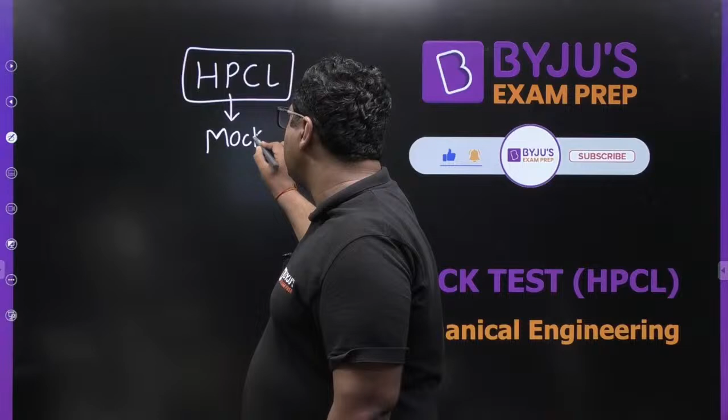So guys, this is a mock test for HPCL. As you know, now only 1 month is there for this examination. So today we have a mock test for the same, following the same pattern as HPCL. We are going to cover 85 technical questions today, and for the non-tech part we have a different time. So 85 questions we will be covering and all the subjects would be covered.

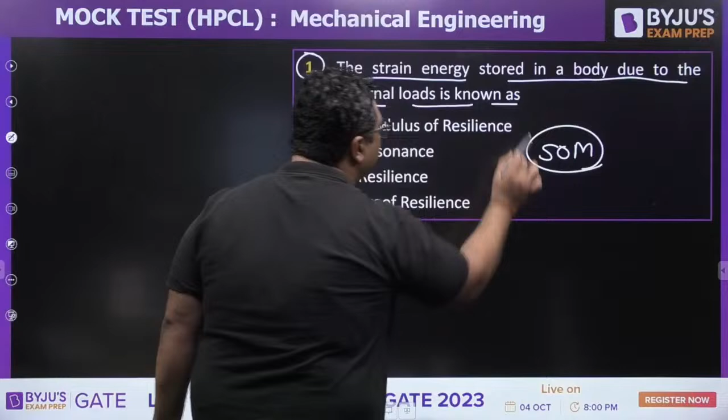Very good, Tomato Singh is saying the answer is C. What about others? The strain energy stored in a body due to the external load is known as - is it proof resilience, resilience, resonance, or modulus of resilience? So my dear, this is the question. It is not mentioned whether within the elastic limit or not, so we will be answering it arbitrarily, and the answer is going to be resilience, because toughness is not in the option, so automatically it would be up to elastic limit only. The answer will be resilience, because proof resilience is the maximum value of resilience - if the word maximum would be there, then the answer would become proof resilience. Resonance cannot be the answer. And if they are asking for strain energy per unit volume, then it would be modulus of resilience. So as it is only strain energy, the answer is going to be C.

Very good, Mani. The answer is correct. Nora, very good, the answer is correct.

Question number 2, this is from computer integrated manufacturing, from production guys. Quickly share the session into the group so that other students can also join it.

The mirror image for a 2D reflection which is generated relative to an axis of reflection by rotating the object by what angle? Nora is saying the answer to be B, Pudina is saying B, Tomato is saying B, Mani is also saying B. So guys, let us say we have the axis like this, and this is a point. If you want to make the mirror image of this point about the y-axis, let us say this is going to be the mirror image.

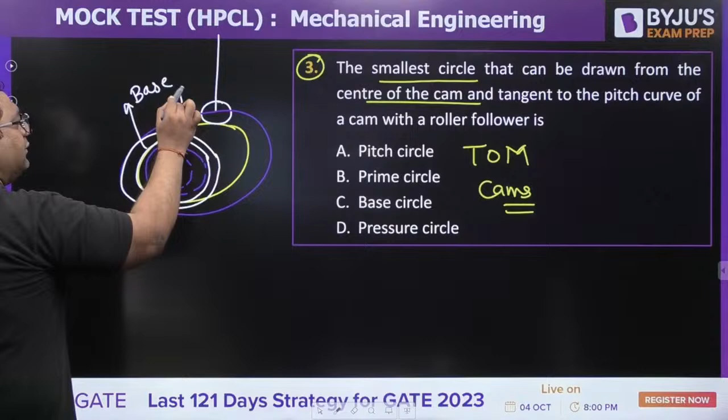So what would be the answer, guys? All of you are saying B, all aligned at B, and yes, you are correct. The answer is B, which is nothing but the prime circle. It is correct. Moving to the next question, guys.

This is from engineering mechanics. So you can see every question is from a different subject, a different topic. So everything is clear, everything is covered, guys.

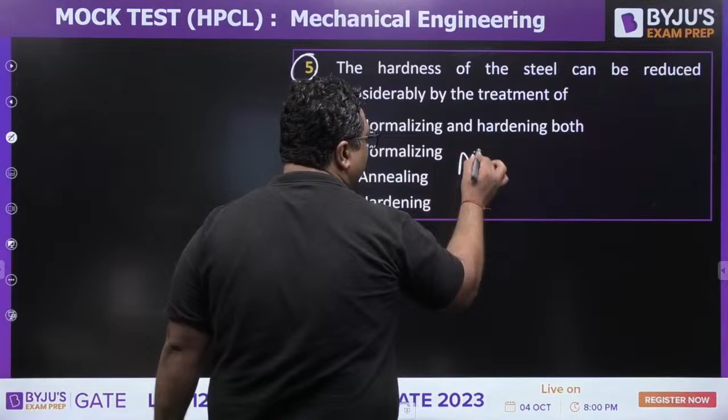Next question is related to heat treatment, that is material science. So guys, just try to solve this one. The hardness of the steel can be reduced considerably by the treatment of normalizing, hardening, normalizing, annealing, and hardening.

Yes, Tomato, what will be the answer? So guys, this is the HPCL level, as I already said, based on the exam we are taking. If you see the GATE champion series, that is going for the GATE level. So based on the level of exam, the level of questions are decided.

Yes, they are asking about the hardness of the steel being reduced - look at this word, hardness is getting reduced. We will go to C. Yes, hardening is done to increase the hardness. Then if you see normalizing and hardening, this cannot be the answer because hardening is there. When we talk about normalizing versus annealing, obviously annealing will reduce the hardness because in annealing we are going majorly for stress relief phenomena, and that is why the answer is C only, because in normalizing we also get fine grain structures, so there too the strength and hardness are better than the coarse grain structure.

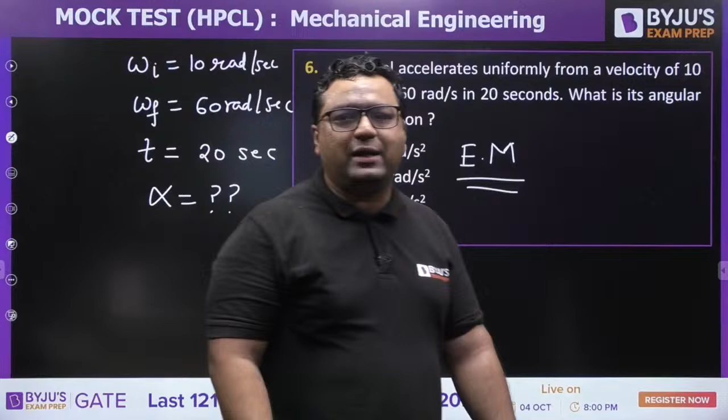So you know the equation in linear motion as v equals u plus at. Here the equation will be omega final equals omega initial plus alpha times t. So guys, just find out the value of alpha. You have all the values.

Yes, Priyanka, what would be the answer? Tomato is saying D, Pudina is saying D. Nora, what would be the answer? So the answer will be D.

So you can put the value. It is 60 equals 10 plus alpha times 20. So alpha will be coming out to be 2.5 radian per second square. D is the right answer, guys.

Now question number 7, guys. The fundamental property of material able to resist abrasion. The options are resilience, toughness, malleability and hardness. This can be considered from SOM or material science, because in both topics properties of materials are there.

Tomato Singh is saying the answer to be D. Pudina is saying the answer to be D. Very good. Yes Priyanka, Mani, Nora, what would be the answer for this one?

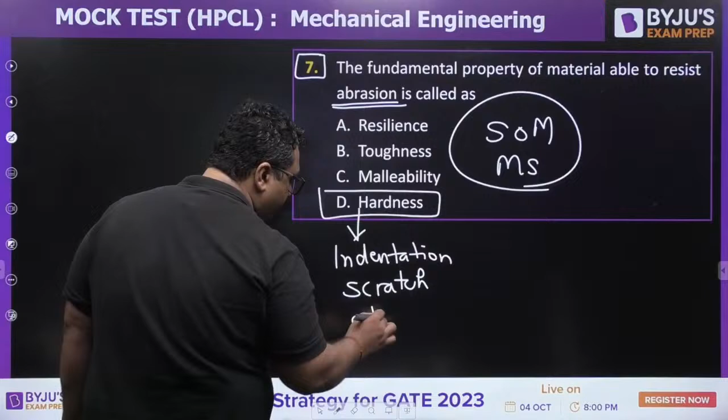So guys, the answer is going to be hardness. Hardness is the property which resists any kind of indentation, which resists any kind of scratches, which resists any kind of abrasion. So guys, for all these, only hardness is the property.

Question number 8, guys, this is related once again to strength of material. You have a simply supported beam of length 4 meter. They have given the length of 4 meter, the value of I, and also the value of load as 9 kilonewton. They are talking about the deflection of the beam. Obviously, if nothing is mentioned, we will talk about the maximum deflection.

So you know the formula for this is PL cube upon 48 EI. You just need to put the value and get the answer, guys. Solve it and give the answer. Formula I have written. Priyanka is saying answer is B. What about others?

Formula is there in front of you, guys, you just need to put the value and get the answer. Load is 9 kilonewton, length is 4 meter, 48, Young's modulus is 200 GPa, I is 12 into 10 to the power 6 mm4. Now everything is in mm, so the answer will also be coming in mm. Solve it and get the answer.

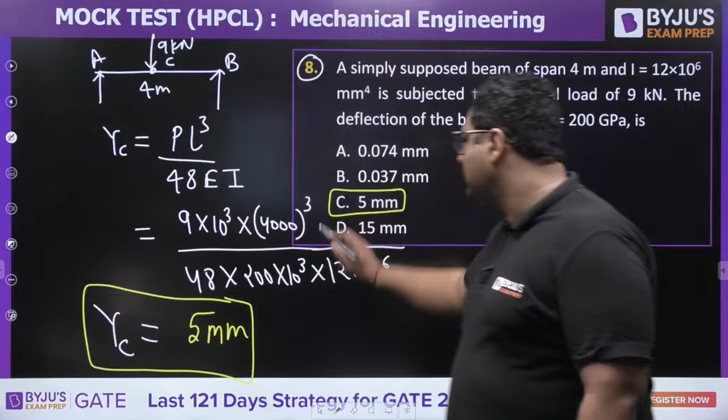Solve it and give the answer, guys. Pudina is saying C, Tomato is saying C. So the answer for this will be C. Yes, when you will see all the things are getting cancelled out and you will be getting the answer to be 5 mm. The answer will be coming out to be 5 mm for this. C is the right answer, guys.

Yes, moving to the next question. Next question is related to the elastic constants and their relation. The topic is from strength of material.

Very good, Priyanka, Pudina, Tomato, Mani, where are you, bhai? Solve this question, guys, now. The relationship between Young's modulus and modulus of rigidity. This is a previous year's question of HPCL as well.

Kameshwari is saying A, Pudina is saying D, Tomato is saying D. Priyanka, what about you? You know E equals 2G into 1 plus mu. E equals 3K into 1 minus 2 mu. So if you see this relation, we can write G equals E by 2 into 1 plus mu. So the answer for this is D.

Very good, guys. Moving to the next question, once again from material science, heat treatment of steels. In the nitriding process, the gas used is oxygen, hydrogen, carbon oxide or ammonia.

Yes, Tomato, this is the level of HPCL. HPCL is going to be easier, BHEL is going to be difficult, that is for sure. So if you see previous year's questions, you will say that they are exactly matching the level. What about this question?

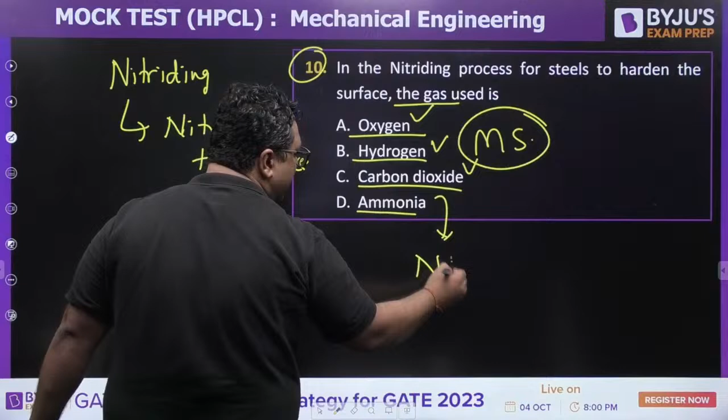Okay, skip. So I am telling you guys, for the nitriding process, we are going to add nitrogen to the surface. Can you tell me which gas out of these is having nitrogen? Arey bhai, this is oxygen, this is hydrogen, this is carbon dioxide. Ammonia is NH3, so when you use ammonia, then only nitrogen will come to the surface. So the answer is going to be D for this.

Question number 11, guys. In the metal forming process, the value of stress required for continuous material deformation is known as - is it ultimate stress, is it flow stress, is it proof stress, is it true stress? Continuous material deformation.

Yes, Tomato. So Tomato and Pudina have said the answer to be B. Yes, Kameshwari, what would be the answer? So the answer for this is going to be flow stress, guys.

As you know, in the compression test you have studied, this is the curve which is coming. This is said to be the mean flow stress. So the answer will be flow stress, because at flow stress the material continues to deform continuously.

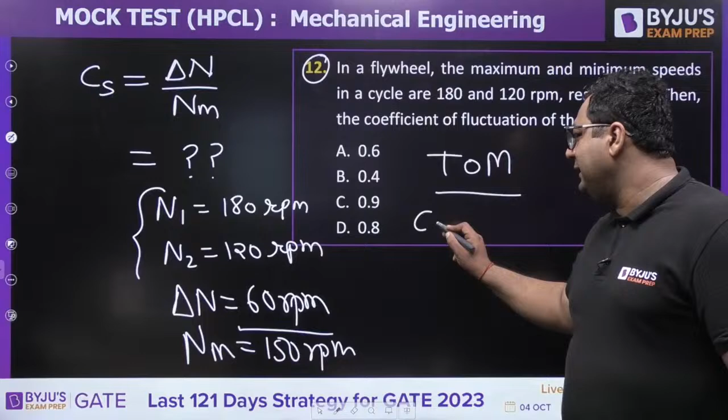So first of all, what is this fluctuation of speed? Yes, delta n by n mean. You can see it is given that n1 is 180 rpm and n2 is 120 rpm. So guys, what would be delta n? 60 rpm. And what would be n mean? 150 rpm. So what would be the answer, guys? Okay, Pudina is saying 0.4, Tomato is saying 0.4. So guys, 60 by 150 - 0, 0 will get cancelled out. This will be 2 by 5. Answer will be 0.4. B is the right answer.

Very good, guys, moving to the next question. This is from columns, once again the question is from SOM. If you see both the papers of last year...

Penetration topic - arey bhai, penetration you study in welding, so which penetration are you talking about here? Tomato, for that let's have a discussion on either phone or WhatsApp. I didn't get what you are asking. If you tell me the topic clearly, I will take a session on that - there is no problem.

So the end fixity coefficient is used in the crippling load equation based on Euler's theory of buckling of columns. The value of the coefficient for the case where one end is fixed and other end is hinged - you know that when you define it, the buckling load is n square. Okay, let me tell you, it is pi square EI minimum upon LE square.

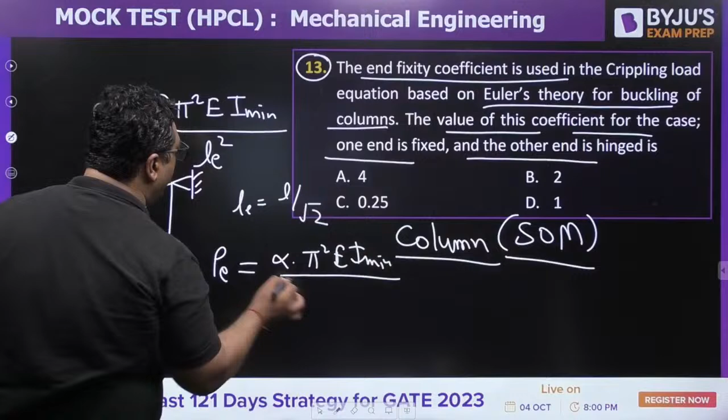So you know that for this case, this deviation will happen, and you can also write it as PE when you put it as LE. So LE will be L by root 2 for this case. So what would be the coefficient coming in the numerator if we take the standard formula as alpha pi square EI minimum upon L square? Can you tell me what would be the answer for this? Okay, Tomato is saying 2, very good, Pudina is saying 2, yes it will be 2, because root 2 squared will become 2. So here 2 will come - that is nothing but the end fixity coefficient. So 2 is the right answer.

Very good, moving to the next question, guys. This is from machine design, welded joints. What would be the answer for this one? A double fillet weld is used to join steel plates 5 mm thick for a length of 20 mm. The allowable tensile stress for the weld material is 100 MPa. The tensile strength of the joint is - you know that generally the tensile strength is given as 0.707.

0.707 T into L into sigma permissible. This is generally the formula. So based on that, you need to answer it. What would be the answer?

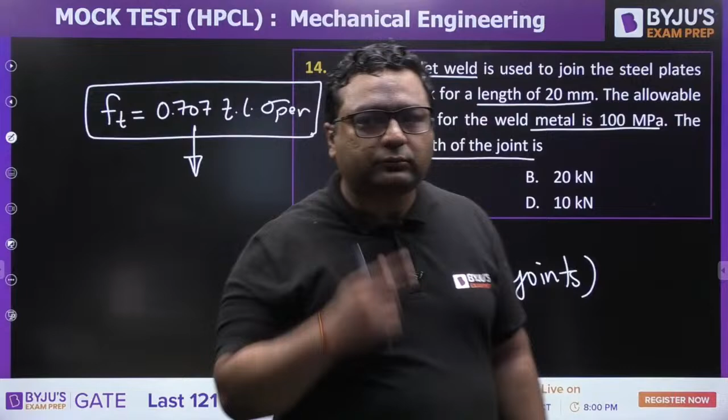Yes, Pudina, Tomato, tell me the answer, guys. Tell me the answer for this one. Very good, both of you are saying 14.14. Yes, Kameshwari, yes, Money, what would be the answer?

So guys, when you see this 0.707, thickness is 5 mm, length is 20, permissible is 100. So the answer will come out to be 7.07 kilonewton.

But my dear, they have mentioned the word double fillet. Double fillet, you need to multiply it with 2. So the answer will be 14.14 kilonewton. The answer will be C for this.

Very good guys, moving to next question. This is from theory of machines, balancing part.

So guys, let us see how many of you give the right answer for this one. This is the 15th question going on. I will be there up to 40 questions, after that Vipin sir and Chandra sir will come for the other parts of the paper.

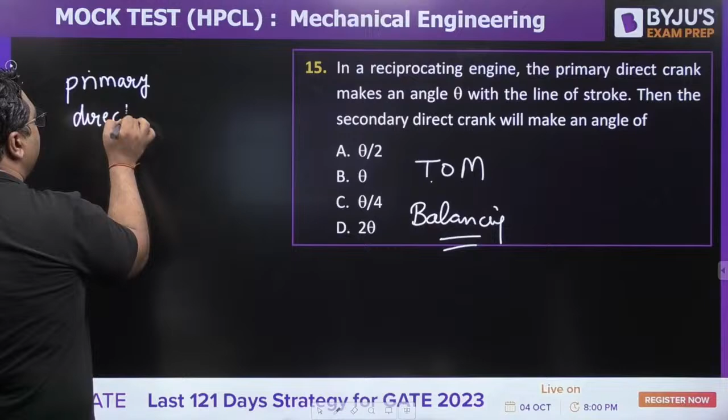Okay, so tell me the answer for this. In a reciprocating engine, the primary direct crank is making an angle of theta. Then my dear, secondary direct crank will make what angle? Solve this, guys.

Pudina is saying the answer is A. What about others? So guys, like and share the session. What about others? Yes, Tomato Singh, what is the answer?

You know that if we have this to be slider, this to be crank, when we are talking about primary direct crank, primary direct and then secondary direct. So my dear, if primary direct is making an angle of theta, like this is primary direct, then there is primary reverse. Primary reverse will also make an angle of theta. Then there is secondary direct. Secondary direct is making an angle of just double, 2 theta. Then secondary reverse is also making the angle of 2 theta. So always remember, the secondary direct is making the angle 2 times.

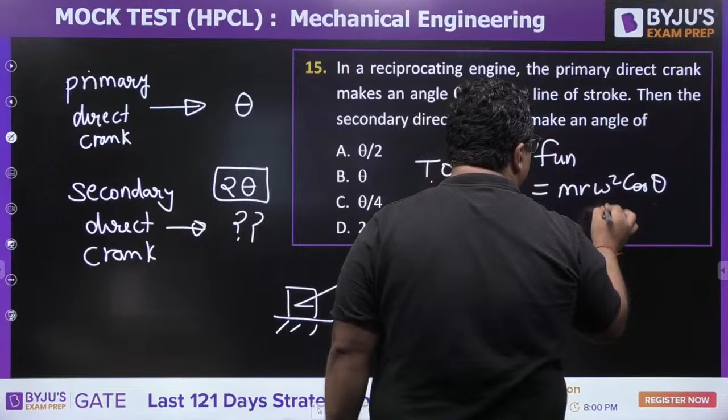Because how we calculate it, you know the unbalanced force is written as mr omega square cos theta plus mr omega square cos 2 theta by n. So this is primary unbalanced force, this is secondary unbalanced force. So in secondary we have 2 theta. So the answer for this is D, guys.

Wonderful. Now next question is from engineering mechanics, from trusses topic. You can see we have covered everything. And the formula for that is M is equals to 2J minus 3. Use this formula and get the answer. M is equals to 2J minus 3, use the formula and get the answer, guys.

Here M is nothing but the number of members, M is nothing but the number of members, and J is nothing but the number of joints, number of joints. Solve it and get the answer, guys.

Yes, yes, yes. Yes, tomato, pudina.

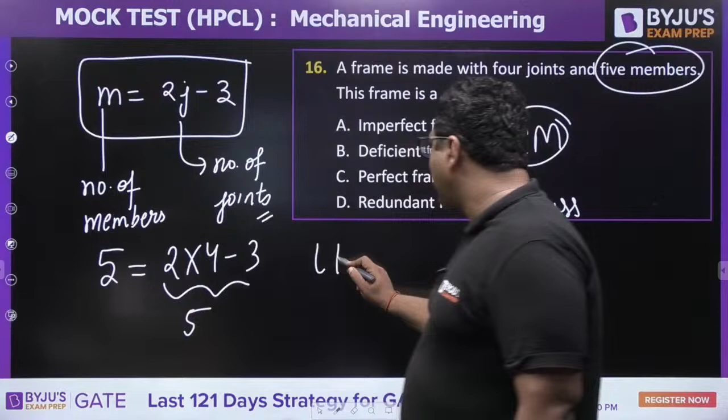So guys, they are saying 5 members, so M is equals to 5, and 4 joints, this is also coming 5. When left hand side is equals to right hand side, it is going to be what? It is going to be perfect frame. So the answer will be C for this.

Moving to the next question, guys. Question number 17. This is saying that a body which can retain its shape and size even when it is subjected to external forces. This is a previous year's question of HPCL. I want to show you that whatever level we are discussing, the same is the HPCL, so I have intentionally added some questions from last year.

Tomato, Pudina are saying the answer is B. Yes, the answer is B, which can retain its shape and size. It is not rigid body. Rigid body means deformation is not there. When deformation is there but retention is there, or regaining is there, then we will call it elastic body. So the answer for this is nothing but elastic body.

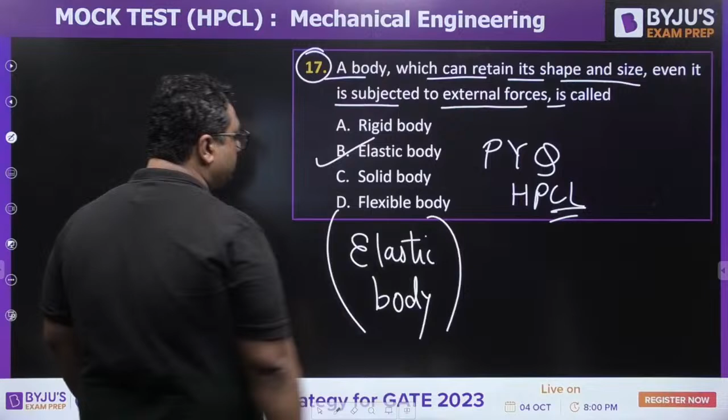Yes. Question number 18, guys, once again from material science. They are asking you the crystal structure of ferrite, crystal structure of ferrite.

Very good, tomato. So if that is the case, you will definitely be selected in HPCL, don't worry. Okay, but the point is their time is limited. You need to solve 170 questions in 150 minutes. So the time you will get is very, very less. You are not even getting 1 minute for one question. Yes, Jovian, you are saying C.

Whenever we have the cooling curve for iron, the melting point temperature is 1535. Then you get delta iron, also known as ferrite. It has BCC structure, this is up to 1410 degrees Celsius. Then this is 900 degrees Celsius, here it is gamma iron, having FCC structure. After this, you will be having alpha iron, which is also said to be ferrite, and this once again has BCC structure. So the answer will be BCC, D is the correct one. D is going to be the answer. I feel you got it.

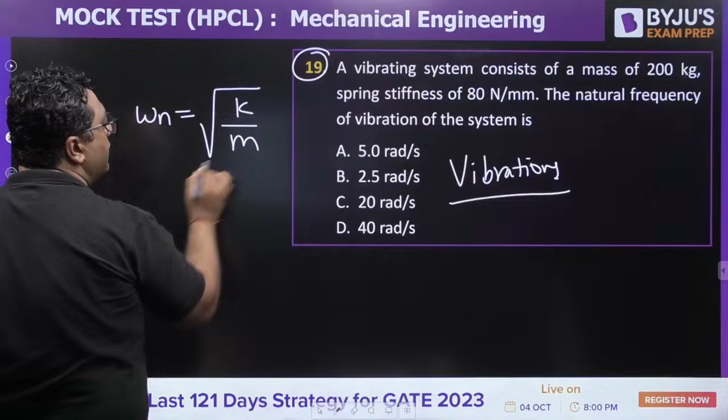Now the question is from vibration. As I said, we are covering all the topics. A vibrating system consists of mass of this, stiffness is this. Natural frequency is root K by M. What would be the answer? Solve it and get the answer.

Very good guys, very good. So solve it and get the answer, guys. Solve it and get the answer.

Very good. If you see this, stiffness is mentioned as 80 Newton per mm divided by 200 kg. But since it is per mm, to make it per meter I will multiply it with 1000. So when you solve it, the answer will come out to be 20 radians per second. You can see without a calculator you are able to do everything.

Okay, next question is from welding now. That is production. What would be the answer, guys, for this question? This is oxyacetylene gas welding, so they are asking you the temperature of the flame in the gas welding. What would be the right answer?

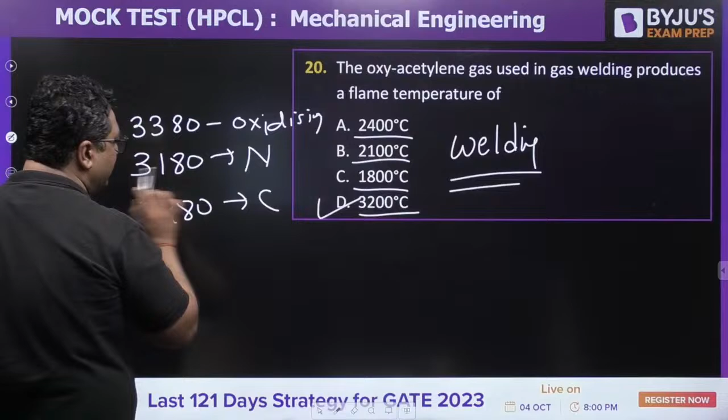Pudina is saying 31,000 or 3100. Sandbok, very good, very good. So the answer is 3200 degrees Celsius, because for oxyacetylene welding, you must be aware there are three types of flame. It is 3380 for oxidizing flame, around 3180 for neutral flame, and 2980 for carburizing flame. So the range is around 3200, D will be the right answer.

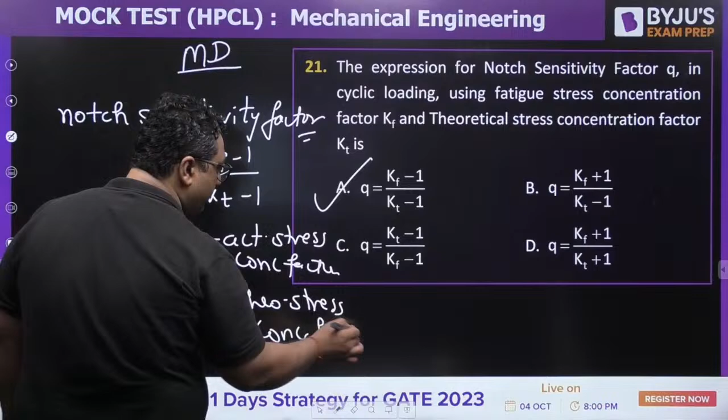So what would be the answer of notch sensitivity factor? Tell us the right answer. Pudina is saying A, tomato is saying A. Sandbog, now it is clear, just refresh it. Yes, A is going to be the answer, which is correct. It is Kf minus 1 divided by Kt minus 1. Kf is the actual stress concentration factor, and Kt is the theoretical stress concentration factor. So A is going to be the right answer for this.

So next question is related to gears, guys. A gear tooth profile generated using the curve traced by a point on the circumference of a circle that rolls without slipping on a fixed straight line is known as? What would be the answer for this case? Epicycloid, hypocycloid, cycloid, or involute?

Tomato Singh is saying D. Okay, what about others? What about others? D, lock kar de. Okay.

So I am telling you about two profiles, involute and cycloid. When you have a fixed circle, this is called the base circle, and we have a line on it having pure rolling motion on this circle, then the locus of any point on this line is nothing but involute. But for cycloid, the circle is fixed and a small circle moves on it, and the locus of any point of this moving circle gives you the cycloidal profile.

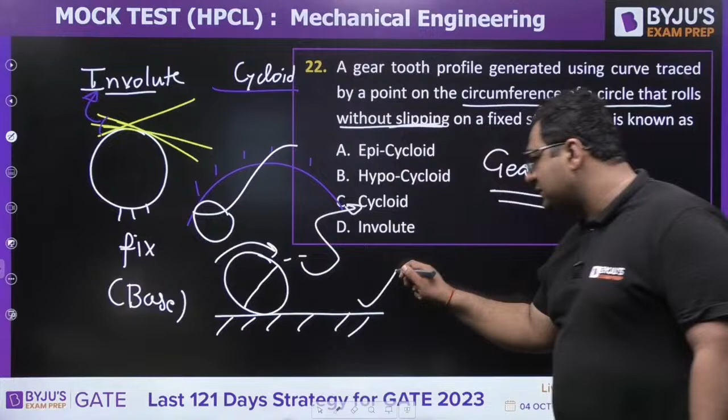A point on the circumference of a circle that rolls without slipping on a straight line - when this circle has a very big radius, it becomes a straight line. So on this fixed straight line, when the circle is rotating or having pure rolling motion, the locus of any point will be nothing but cycloid. So when the circle is fixed, we call it involute, but when the line is fixed, we call it cycloidal. So the answer is C for this.

When we talk about epi and hypocycloid, if in place of the straight line you take a circular path, one profile will be inside the circle, one will be outside the circle. So this is called epi and hypocycloid. Epi and hypocycloid are the two parts of the cycloidal profile.

Is it clear, Podina? Shekhar Chandra, very good, the answer is C. This question is from casting, I told you we have covered all the topics. Yes, now is it fine? Sandbook, if anybody else is facing any quality issue with the video, please tell me, because from my side it is showing perfectly fine.

Yes, solve this question. Shekhar Chandra is saying B, Modi ji is also saying B. Very good. So Pudina, Tomato, what do you say? You are going to make the pipes of uniform thickness, so the answer for this is nothing but centrifugal casting. And in centrifugal also it is said to be true centrifugal casting.

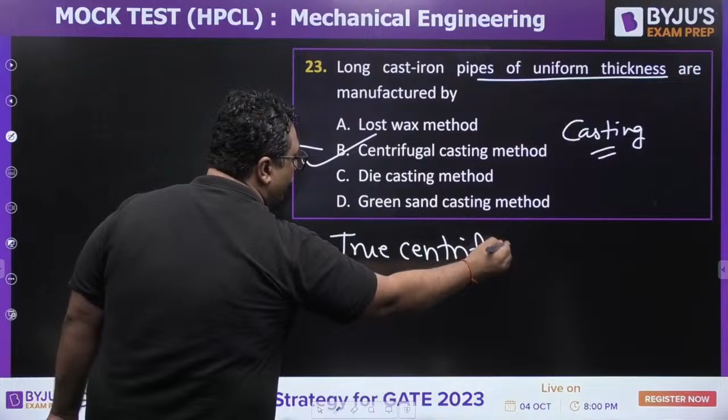Okay, very good guys, moving to the next question. This is once again from machine design, design of shaft. They are saying the bending moment applied on a shaft is 30 Newton mm and twisting moment applied is 40 Newton mm. What will be the equivalent twisting moment? You know the formula is this.

Apply the formula, get the answer. Pudina is saying A, Shekhar Chandra is saying A, very good. So guys, we are still left with many questions, total is 85 questions, around 40 I will be taking. Tomato Singh is saying A, Pudina is saying A, Chandra is saying A, very good, Modi ji is also saying A. When Modi ji says A, the answer will be A.

Okay, it is going to be 30 squared plus 40 squared. The answer is 50 Newton mm. So you can see no calculator is required for the same.

Now once again from casting. This is from solidification time. Tell me the right answer guys. Yes, so Modi ji, Tomato, Podina, Shekhar - yes, what would be the answer? Kameshwari, what would be the answer for this?

Pudina is saying A, Shekhar is saying A, Modi ji is saying A. Okay, so the solidification time is defined as K into volume by surface area, whole square. So the answer for this, no doubt, is A.

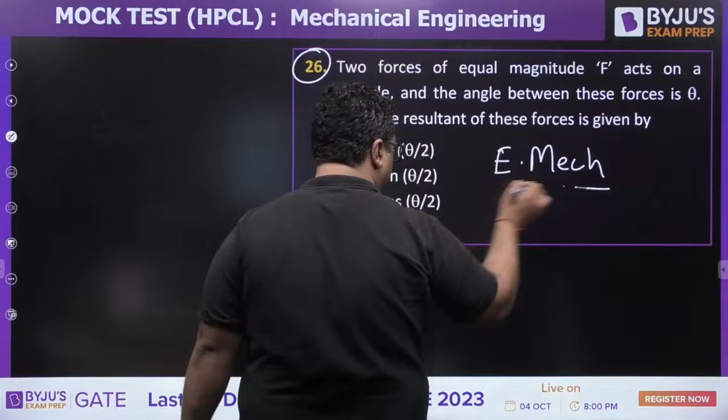You are correct. Question number 26 from engineering mechanics. They are saying there are two forces F and F acting on a particle at an angle of theta. You need to find out the resultant of them. Very good Modi ji, but you forgot to put K. You forget about the solidification constant.

Solve this one guys, now this is an engineering mechanics question. I will make it easy for you. You put one force here, other force here, they are making the angle of theta. You know the resultant will be like this. This is F, this is F, this is the resultant. You can see this one is F cos theta, and this one is F sin theta. You need to find out the resultant. Try to solve it, it is a good one.

Happy family is saying C. Shekhar is saying C, very good. Modi ji, what do you say? Pudina is saying C, very good.

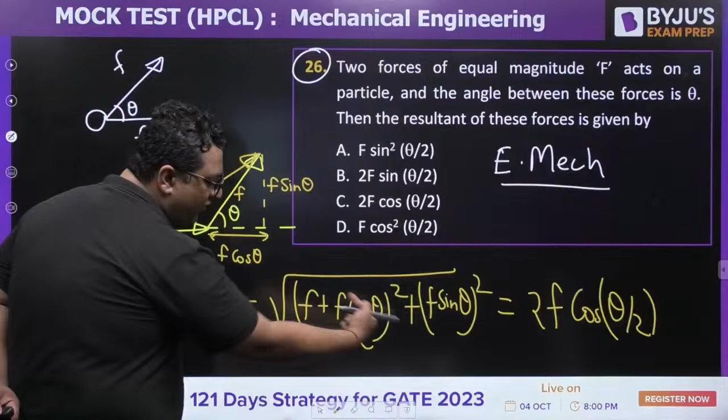So the resultant is nothing but this squared plus this squared, that is F plus F cos theta, squared, plus F sin theta squared. The answer comes out to be 2F cos theta by 2. Why does this come? Because it is F square plus F square cos square theta plus 2F F cos theta plus F square sin square theta. So in the square root, F square plus F square cos square theta plus F square sin square theta gives 1, plus F square plus 2F F cos theta. So 1 plus cos theta is 2 cos square theta by 2. So you will get the answer to be C for this.

That's right, moving to question 27. This is related to vibration, damped vibration. Very good, this is from damped vibrations.

In damped vibration you need to find out the ratio, the logarithmic decremental ratio. How is it defined?

Dhalapatti ji is saying B, Shekhar Chandra is saying C. What about others? What about others? Pudina is saying B, okay. Rahul Gandhi, very good, B. Kejriwal ji will also come now. Modi ji says C, Tomato Singh says B, Shyam Kiran is saying B.

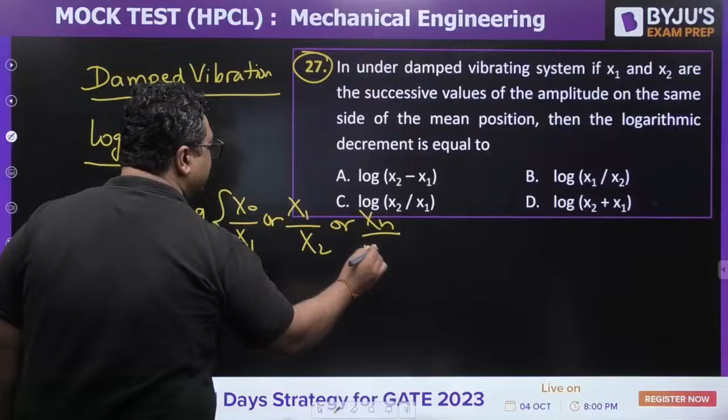So guys, the answer for this is log x naught by x1, or x1 by x2, or xn by xn plus 1. So you see the answer is going to be B for this.

This is once again from material science, crystal structure. For FCC, what is the average number of atoms? Average number of atoms for FCC, not coordination number, Shekhar, average number of atoms.

Very good, for the last question the answer is B. So what is the average number of atoms for FCC?

Dhalapatti, Rahul Gandhi, Pudina Yadav, Shekhar Chandra, Happy Family, Modi ji, Tamatar Singh, Shekhar Chandra.

Question number 29, guys, this is from assumption of SOM, a previous year's question. It can also be said to be from engineering mechanics, type of forces. So I want to show you the exact level of the paper.

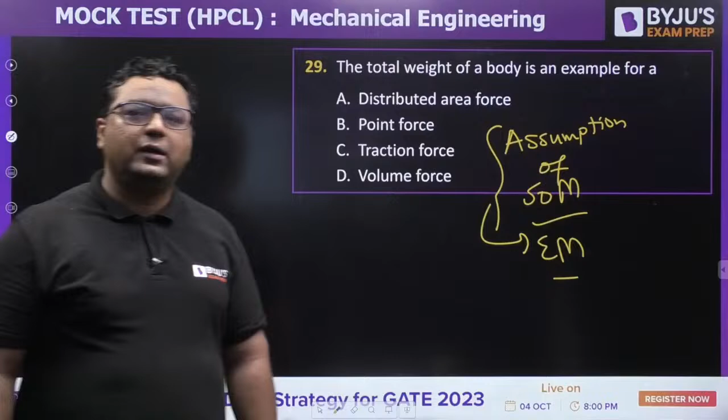Shekhar is saying D is the answer. Dhalapatti ji is saying D. Pudina Yadav is saying D. Happy Family, Rahul Gandhi say D, very good, bahut hi badhiya. Tamatar Singh says D, so the answer is D, guys.

Because when we talk about forces, there are two types: surface and body forces. Body forces are those for which every point gives its contribution, so only in volume can you count every point. So these forces are nothing but weight and centrifugal force. So the answer is D for this.

You also know that volumetric strain is epsilon xx plus epsilon yy plus epsilon zz, and it is also given by dV by V. So you need to find out the value of dV, solve it and get the answer.

Solve it and get the answer, guys. Solve it and get the answer.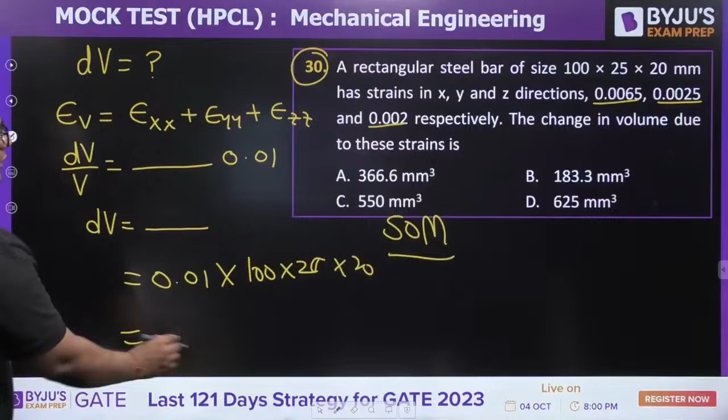Very good, next question guys, 31, this is from metrology, production again. I told you we have covered all the topics. There was a question from SOM as well. This is from metrology. Material science is already there, casting, welding we have already seen. Metal cutting will also come, don't worry.

Dhalapatti ji is saying the answer is A. Very good. Shekhar is saying A. Very good. Modi ji, Rahul Gandhi, Tomato ji. Modi ji is saying okay, nothing. Rahul ji is saying 31A.

Okay, so my dear, if this is the nominal size line, you have any size, upper limit deviation is always said to be upper deviation. Lower limit deviation is always said to be lower deviation. So the answer is upper deviation.

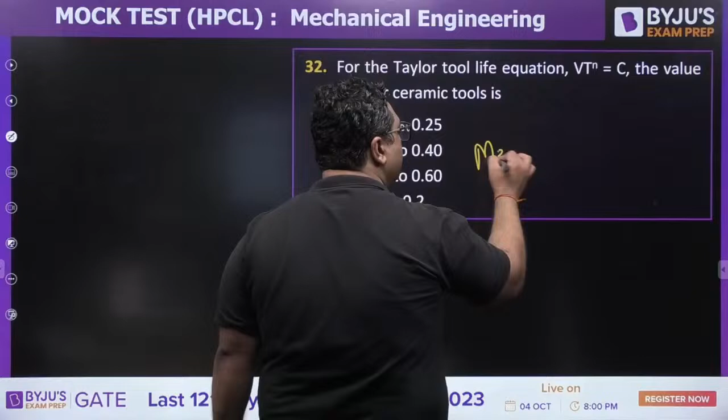Next is from metal cutting. Once again the question is from production. The value of N for ceramic tool is, the value of N for ceramic tool is, yes.

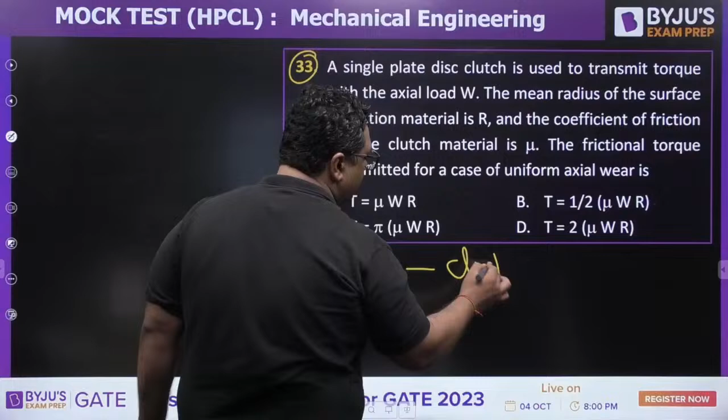Question number 33 once again from machine design. This is from the design of clutches. Uniform wear theory formula. Yes. Let us see how many of you give the right answer guys.

Very good. Yes brother, Modi ji, Rahul ji, Pudina, Tomato, Dhalapatti. Okay, Shekhar Chandra is saying the answer is B. Okay, what about others? Rahul Gandhi is also saying A. Okay, what about others?

Okay, BA. I am telling you, generally the formula is mu WR. This is the normal formula when we are using. But when we are going for UPT and UWT, my dear, then T for UPT is coming out to be 2 by 3 mu WR mean. Here R mean is defined as R naught cube minus Ri cube by R naught square minus Ri square. This is how you are going to define it.

T of UWT is defined as 1 by 2 mu WR. So if you are going to write it as R, it is fine. Otherwise, when you will be putting it, this is half mu WR. It is coming when inner radius is 0. Otherwise, when you will define it, it will be coming out to be mu W R naught minus Ri.

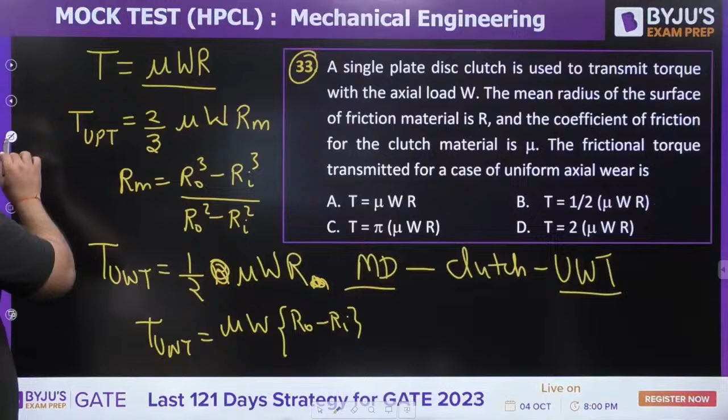Okay, so what I want to say is, here they have already mentioned that single plate disc clutch is used to transmit the torque axial load W. The mean radius of the surface of friction material is R. So what they have given R as, it is the mean radius. So the answer is going to be 1 by 2 mu WR for UWT and 2 by 3 for UPT. So the answer is going to be B for this. Is it clear? So the answer is going to be B.

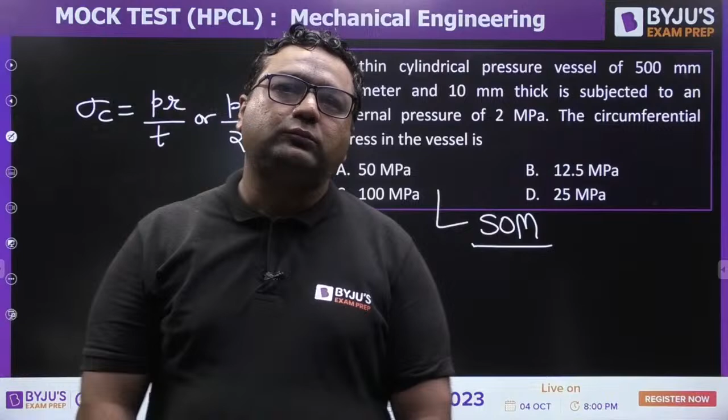Yes guys. Pressure is 2 MPa. Diameter is 500 mm. 2 times of thickness. What will be the answer? Okay. So everyone is saying, sir, the answer is going to be A. So the answer is going to be 50 MPa. Wonderful, guys. It's really nice.

Let us move to the next question now. Question number 36. Once again, the question is from vibrations. The critical damping is said to occur when the frequency of damped vibration is. You need to tell whether in the critical damping vibrations are there or not. Because if vibrations are there, then only the frequency will be there.

Yes. Rahul, Modi ji. Yes, Pudina, Tomato, Shekhar Chandra. Yes.

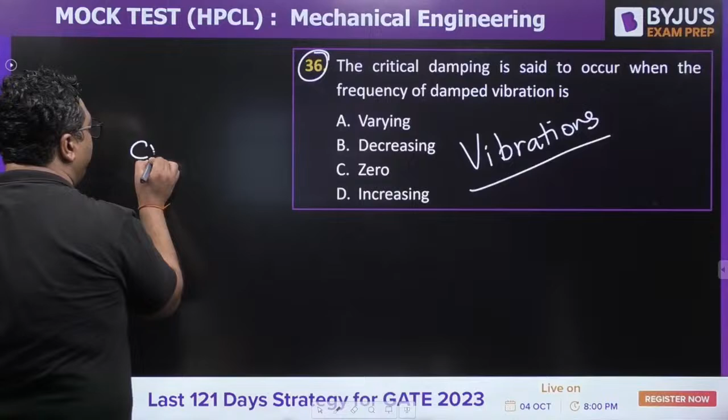Very good. So when we are talking about the critical damping, in critical damping vibrations are not there. So when vibrations are not there, how can frequency be there? The answer is 0 for that.

Okay, very good. Question number 37, guys. Once again, from vibration, they are asking the transmissibility of a vibrating system when R is more than root 2 will be. When R is more than root 2, what would be the value of transmissibility ratio?

Shekhar Chandra is saying the answer to be B.

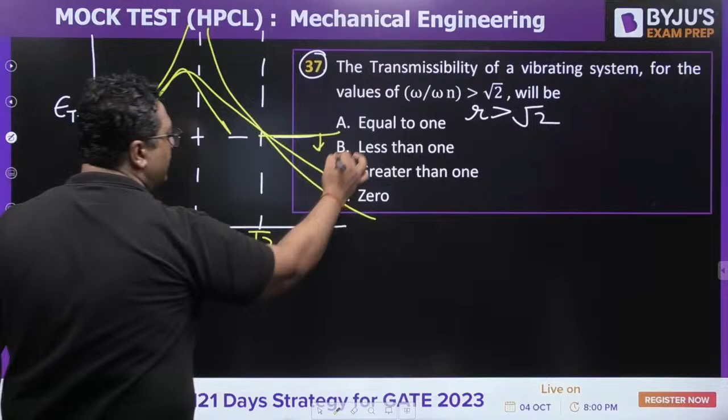Very good. Moving to the next question, 38. Soderberg machine design fatigue loading topic.

Yes guys, so in the Soderberg method, a failure stress line connects the endurance limit for reversal loading with yield strength, variable stress, shear stress or ultimate stress. What would be the answer for this one? Do answer it. Shekhar is saying A, Rahul is saying A.

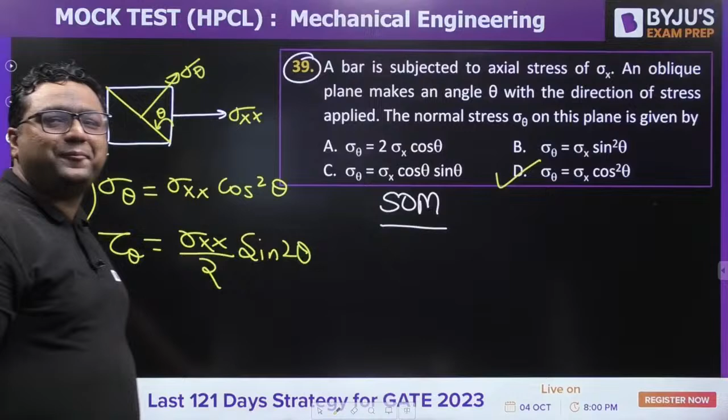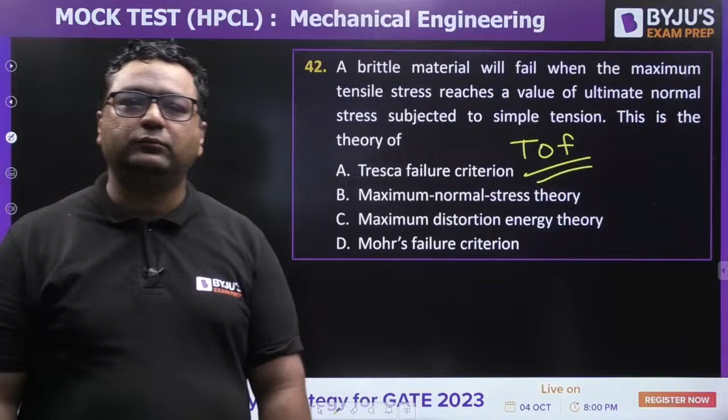Shekhar is saying B, Sandbok, Tomato, Pudina, Rahul are saying B. Modi ji, Pudina Yadav is also saying B, बहुत बढ़िया, Modi ji is saying B, Mohammad Sahil is saying B, Dhalapatti ji is saying B.

So guys, B is the right answer. B is the right answer. Very good. So okay, one more question.

Okay, yes, so I am feeling happy. Let us see one more question. This is from column. So these 4 to 5 questions are extra from my side to you guys.

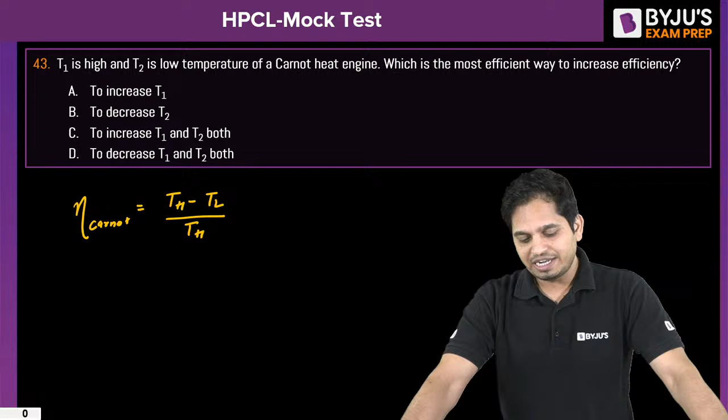43D, no, Podina, that is not correct. 43, no, that is not correct. Or I can say T1 minus T2 by T1. T1 is the higher temperature, T2 is the lower temperature.

So you see, 43B is correct. Yes, Mohammed Sahil, 43B is correct.

So you see, if you are increasing T1, your numerator is increasing. Yes, efficiency will increase, but your denominator is also increasing. Your numerator and denominator both are increasing.

So you are not sure how much it is going to increase, but if you are decreasing T2, that means the lower temperature.

If you are decreasing T2, only your numerator is going to increase while your denominator remains the same. That means your efficiency will have a higher increase. So decreasing T2 is much more efficient than increasing the higher temperature T1. So the answer is B.

43B, yes Shekhar, that is correct, B is the correct answer. Who said C? No, why? What was the doubt? Even Tomato said C. Why do you people come up with these creative names?

Okay Rahul again, this is 43 right? Podina said D, no D is not correct. B, Shekhar and Mohammed are correct.

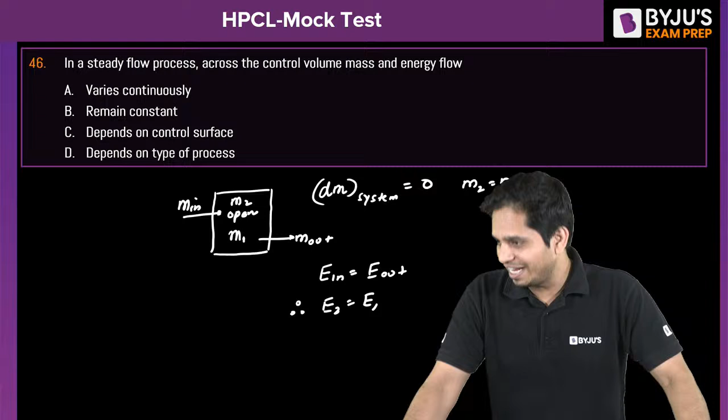Okay, clear? Level increase karo, sir. This is the level for HPCL, yeah. If I bring gate questions, there is no use of that. Very simple questions come. Can you please increase speed? Yes, but explanation is also required, right? We are already on a very high speed.

47. The energy - some numericals are also coming in between. So 47, and the timer is on.

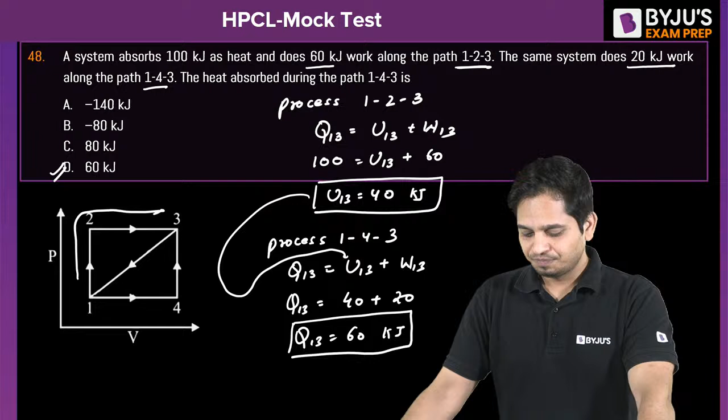Okay, but I have a restriction, I need to explain. Okay, now next question, and the timer is on.

45 seconds. We have a heat pump that absorbs heat from the atmosphere. We have an atmosphere at 10 degrees and a room is to be maintained at 25 degrees. So the lower temperature is 10 degrees, the upper temperature is 25 degrees. But there is a temperature difference of 5 degrees that exists between the working fluid and the atmosphere on one hand, and the other hand too.

So there is a temperature difference of 5 degrees on both ends. Now work given to the heat pump is given, heat delivered I need to find out. Okay, so do I need to draw a diagram? Please write the question number, Podina, so that I know what question you are answering.

So now they are telling me that this is not a reversible heat pump or a Carnot heat pump. If it is a Carnot heat pump, then the working fluid temperature and the reservoir temperature will be the same. But it is an actual heat pump, so my working fluid cannot operate at the same temperature as the reservoir.

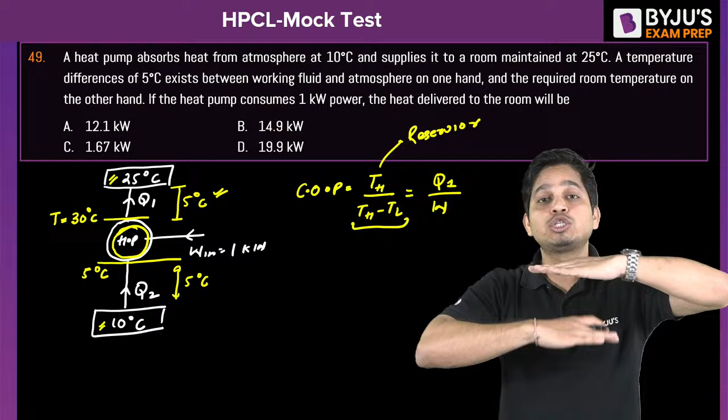We all know that COP of heat pump is T higher upon T higher minus T lower, which equals Q1 upon W. Now do not tell me, sir, this is for Carnot. Yes, this is for Carnot, but it is for Carnot only when you put reservoir temperatures here. But if I put my actual temperature here, then I can use it for my actual case as well.

So what can I write here? I can write 30 degree, which is 303, and 30 minus 5 is 25. Q1, W is given as 1 kilowatt. So whatever you are going to get, now tell me what is the right answer.

I hope this concept is clear to you. And I am not saying these types of questions are asked in PSUs. Just try to solve it one more time. I think heat delivered you need to find out, right? So this is just 1 second, 303 divided by 25.

We converted... A is the correct answer, irreversible to reversible. No, we did not do that. What I am saying is, if I need to calculate the COP of the Carnot, or the maximum COP this heat pump will have, so what will I do? I will do 25, which is 298 upon 25 minus 10, this is 15. This is my maximum COP that this Carnot heat pump will have, if this heat pump is a Carnot heat pump. I don't know how much is this.

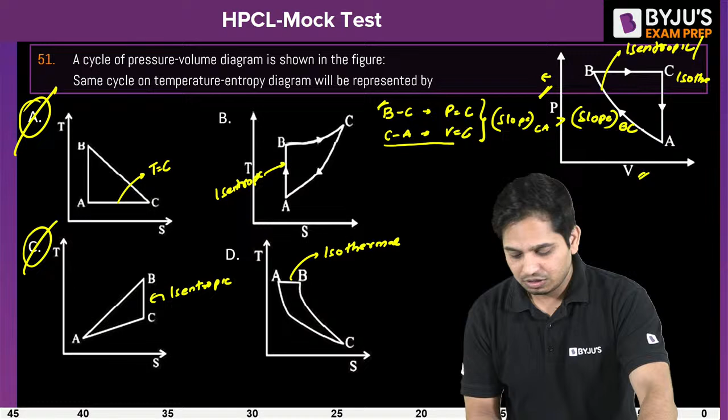So you see, if I talk about this and this, which slope is higher, BC or AC? If I see option number B, I can say that slope of... I hope you all know how to identify the slope. If a line is more close to the y-axis, it has higher slope. If a line is more close to the x-axis, it has less slope.

So I can say that slope of AC is greater than slope of BC. You see AC is more close to the y-axis while BC is like this, more close to the horizontal axis. Okay, nice, so you already knew this answer, right? Do not try to remember the answers, try to come with the logic. I hope if you know the logic, it's good. So this is matching our right option.

But if we talk about option number D, and I extend this line and this line, now you see this AC is more close to the horizontal axis while BC is more close to the y-axis. So here I can say that slope of BC is greater than slope of AC, which is not concluded by my PV diagram. So B is correct, B is correct.

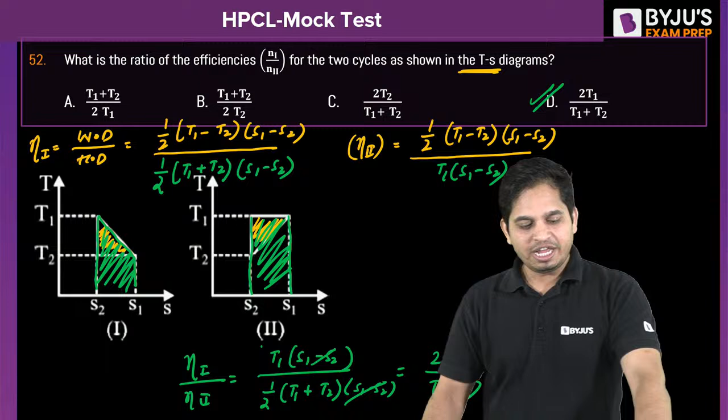Let's move on to the next question, question 53. The entropy will usually increase when? Now there are 5 options, A, B, C, D, we need to know. The timer has started. Now you need to tell me the correct answer.

A molecule is broken into 2 or more smaller molecules. A reaction occurs that results in increase in the number of moles of gas. Process is adiabatic, process is reversible adiabatic. A liquid changes to a gas.

So C is the correct answer. Yes, Chaudhary, that is correct. The only possibility when the entropy is not going to change is first when it is reversible. So when it is reversible, entropy generation will be 0, and it is adiabatic.

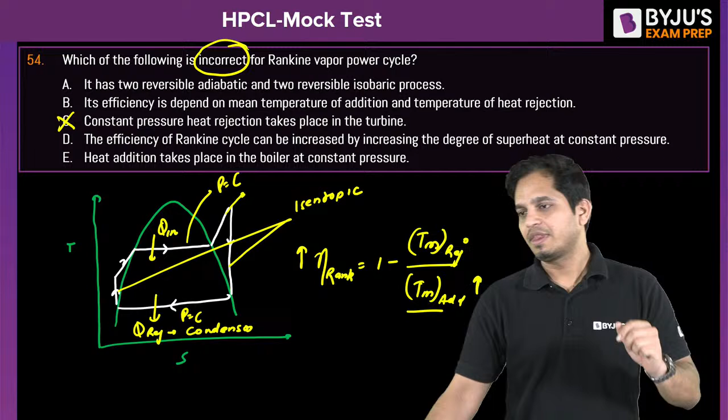Now question 55, I think 6 questions are left, we will go to 60. Timer is started. The efficiency of a superheated Rankine cycle is higher than the simple Rankine cycle. For a superheated Rankine cycle, efficiency can be written as 1 minus mean temperature of heat rejection upon mean temperature of heat addition.

B is the correct answer. 55 B is the correct answer.

Sir, do you teach thermal? Yes, I teach thermal. Yesterday only we had a class on YouTube. Okay, not yesterday, day before yesterday.

Okay, so efficiency of a superheated cycle. Do I need to draw a diagram for you? I hope you all know what is the Rankine cycle, I just told you. Let me draw it here. So a simple Rankine cycle will look like this, this is a TS diagram. A simple Rankine cycle will look like this.

Now if I do superheating, where will I do it? I will do it in the boiler. So this is 1, 2, 3, 4. Now I already told you what are the processes. 2 to 3 is boiler, constant pressure heat addition in boiler.

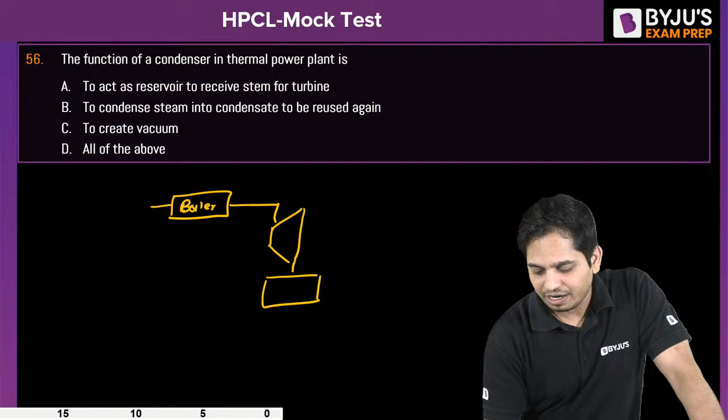The function of condenser in a thermal power plant is - now where do we install a condenser? After turbine. Okay, we have a boiler, then we have a turbine, and then we have a condenser here. Actually condenser is very close to turbine, and then we have a pump, and then it goes back to the boiler. This is the flow chart, this is turbine.

Okay, 56D, that is correct. So what is the function of condenser?

First of all, whatever steam is coming in from the turbine, it stores it. So it acts as the reservoir for the steam coming from the turbine. Then it also condenses that steam into water so that you can again pump it to the boiler. That is the second function.

And it also creates vacuum. Why does it create vacuum? It actually maintains a little less pressure than atmosphere, so that in the turbine you can expand it to the lowest minimum pressure and maximum work output.

You see, this is your P3, right? So you try to reduce your P4 to a minimum value, and if you reduce P4, then the expansion is more. The difference between the pressures is more and the expansion is more, so work output from the turbine is more.

That is why you try to maintain a little lower pressure in the condenser, usually lower than the surrounding, so that in the turbine you can expand it up to surrounding temperature. So it also creates a little vacuum in the system. So all of the above, very nice.

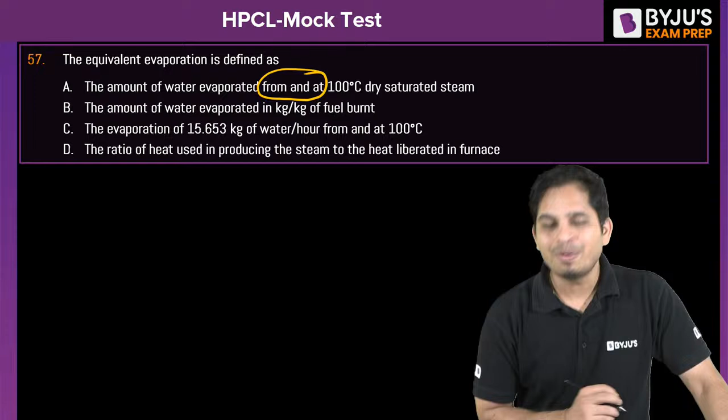So the amount of water that is evaporated at 100 degrees Celsius and atmospheric pressure into dry saturated steam, that is equivalent evaporation. In other terms, it is also called 'from and at 100 degrees Celsius.' This is a way to say it. So if you didn't know this definition, now you know.

Now we are left with 3 more questions. Let's move to question 58 with reheat Rankine cycle. I hope you all know the reheating cycle. What is the reheating cycle? Rankine reheating cycle.

And here again, accuracy and precision both are important. Yaar, what type of question is this? Both are important, no? 58D again, yeah, Chaudhary was saying it was correct. Yes, Podina, 58 is correct.

So in reheating cycle, what you do is... look, in exam you do not need to draw the diagram. The diagram is in your mind. You already know the diagram, you only have to mark the answer. But to explain, I need to draw this.

Actually precision is important but not as important. Look, precision is important in numerical type questions in GATE, because you need to get a very precise answer, even decimal places. But accuracy is much more important in PSUs, because options are given to you and you mark the closest answer you are getting. But precision is more important in GATE, usually in numerical answer type questions.

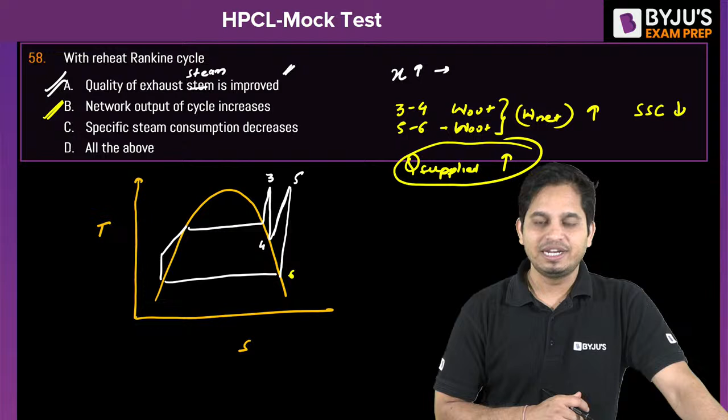Okay, then so this is also correct. And specific steam consumption decreases. Yes, because if the work output is increasing, then the amount of steam required from the boiler per unit work output decreases. Now you need less steam for the same amount of work output, so specific steam consumption decreases. Also one more point, heat transfer Q supplied also increases. This is not given in the question, but it could be one of the options. So Q supplied also increases. So A, B, C are all correct, and therefore all of the above is the correct answer.

59th question, back work ratio. Now you all should know this, I am not going to explain this. A, B, C, D - 59, which one is correct? Timer is not required in this. D is correct, yes, 59D is correct, that is absolutely true.

Okay, where are other people? 59D is the correct option. Do you all know this back work ratio? It is basically when turbine work is compared with compressor work. Okay, yes, D is correct.

And let's go to the last question, and then Chandra sir, Chandrasekhar sir will join. Gas turbine - I have added some questions from Rankine. Again we have some other mock test. Yes, work ratio is 1 minus back work ratio. What is going to happen is, again, we are coming with other mock tests, BHEL as well as HPCL.

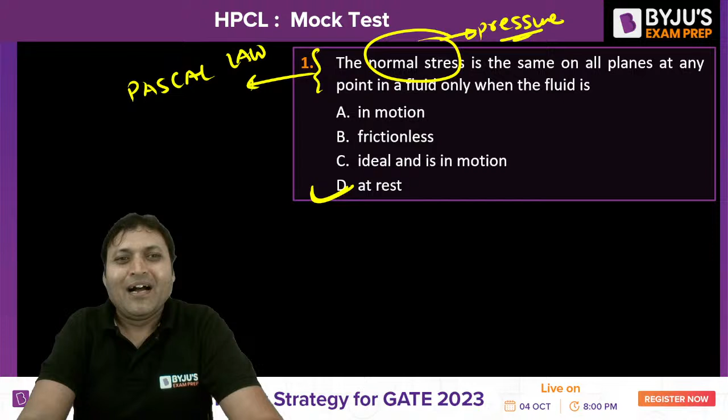Pressure is a scalar quantity. We can call it a zero order tensor. Stress is the second order tensor quantity. It requires magnitude, direction, and plane of action. Whereas pressure only requires magnitude, it is a scalar quantity, or we can call it a zero order tensor.

The next question. Very good, very correct.

The next one, hydrostatic force. Formula based, direct question, all the way from fluid mechanics. The hydrostatic force on one side of a submerged surface of unit area with centroid 3 meters below the free surface. What is centroid? The center of gravity where the weight of the body is supposed to be acting. That is called a centroid. It is at a depth of 3 meters below the free surface of the liquid. What will be the magnitude of hydrostatic force from one side?

Hydrostatic force is given by rho into G into A into X bar. X bar is the depth of centroid of the plane surface from the free surface of the liquid. So it will be gamma, rho into G, gamma into 1 into 3 gamma will be the answer. Option A.

Umar, Tomato, well done. Good, good, good. Keep it up, there are others. I want everyone to respond. Whether you are giving the right answer or incorrect answer, that is not important. What is important is your involvement, your participation. That is highly important to get the clarity to understand, because when you will not commit mistakes, then you will not improve yourself. So committing mistakes is all fine. Do not be afraid of committing mistakes.

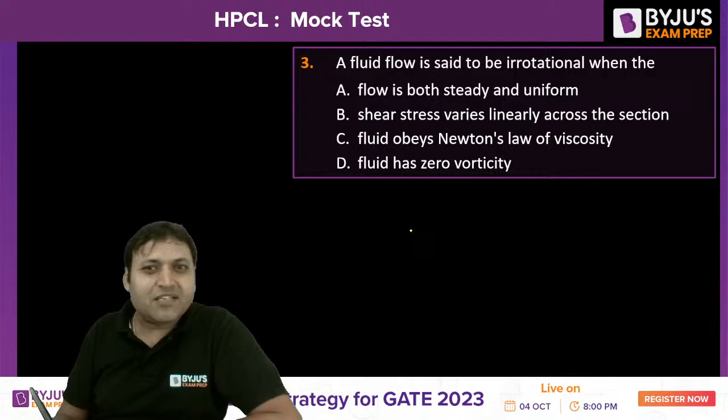Question number 3 is from fluid kinematics. A fluid flow is said to be irrotational. When do we call the flow to be irrotational? Is it when the flow is both steady and uniform? Or when shear stress varies linearly across the section? Or fluid obeys Newton's law of viscosity? Or fluid has zero vorticity?

Sometimes there might be a situation where you feel that two or more options are looking correct, but the one which is most appropriate will be the right answer for the question. All the options will not be exactly correct, but you might have a doubt. The one which you feel is more correct or better will be the right answer.

Correct, so the fluid flow will be irrotational when it has zero vorticity. What is vorticity? Twice of angular velocity, or we can say curl of velocity vector, cross product of del operator and velocity vector. If it is zero, then the flow is irrotational. For irrotational flow, vorticity must be zero.

Question number 4, very simple, and the question is from a very, very important equation, the Bernoulli equation. What is the answer for question number 4? Everyone, it is about the unit only. P by gamma plus V square by 2G plus Z is constant. It is applicable to ideal flow. Bernoulli equation is only applicable to ideal flow. What is the unit of each and every term here?

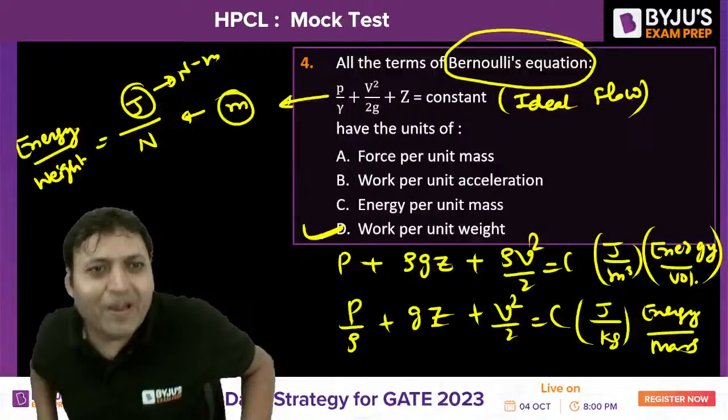If we write P by rho plus GZ plus V square by 2 equal to constant, it is energy per unit mass, joule per kg, or we can call it energy per unit mass. So it is work per unit weight or energy per unit weight, which is the correct answer, option 4. Option D is correct. Question number 5.

Question number 5 on the screen. The power dissipated in a light loaded viscous fluid lubricated bearing at N RPM is 1 kilowatt. The power dissipated at 2N RPM will be what? So we need to develop a relation between power and RPM, isn't it? The question says to develop the relation between power and RPM.

So power is what? Power is equal to force into velocity. Tangential force into velocity, that will be the power. Force can be written as mu into A into V by H, from Newton's law of viscosity. So power is proportional to velocity squared, and velocity is proportional to N. We can say power will be proportional to N square. That will give you the value. So P2 by P1 equal to N2 by N1 square. N2 is 2, so it will be 2 square.

P2 will be equal to 4 kilowatt. It will be 4 kilowatt, it will be 4. Option B, isn't it option B? B is the answer. Power is proportional to N square.

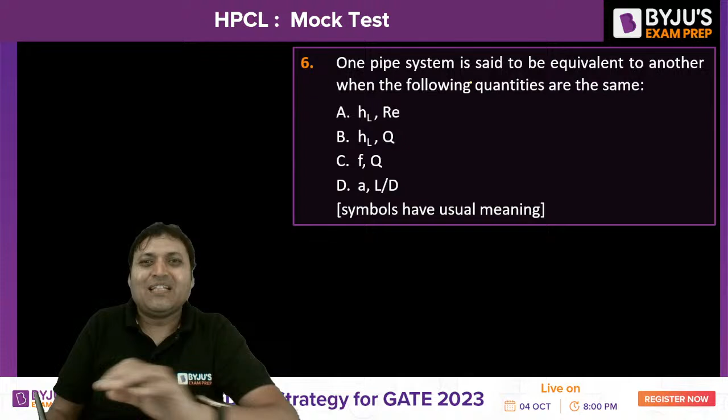The pipe system is said to be equivalent to another when the following quantities are same. A pipe is said to be equivalent to a compound pipe system when the head loss and the discharge remain same.

Yes, Pudina, Deepak, welcome. How are you? I hope your preparation is going smooth.

Question number 7 from the boundary layer theory. Those who have any doubt in understanding any concept can raise it through the comment section. The thickness of laminar boundary layer on a thin plate is 2 cm at x equals L by 2. The thickness at x equals L will be?

Preparation is going on in a turbulent way. Turbulent flow does not separate, it remains attached, so it is better. Your preparation, you are attached to your preparation - that is fine, that is good actually.

So delta is directly proportional to root x for laminar boundary layer. So delta2 by delta1 equals under root of x2 by x1. What is x2? That is L. L upon L by 2 under root. Delta2 equals delta1, which is 2 centimeter, multiplied by root 2. That will be the answer. 2 root 2, what is 2 root 2? 2.828. D is the answer. Option D is correct.

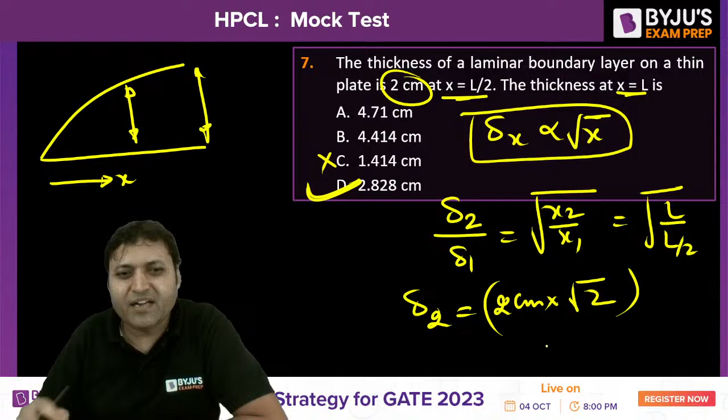Question number 7, right? Question number 8, from model analysis.

Good, you guys are applying the concept of fluid mechanics in your day-to-day life. Engineers are so good at cracking jokes that they use engineering concepts in their jokes.

Question number 8: A 1:10 reduced scale model of a water turbine runs at the same speed as that of the prototype. For prototype, what is the first step to write all the given parameters? Then you will be able to develop the strategy to solve. Prototype is P, and M is for model. I am using these suffixes, prototype and model. So 1:10 means if the diameter of prototype is 10 unit, then the diameter of model is 1 unit, and the RPM is same: NP equals NM equals N, same speed.

The ratio of prototype to model turbine discharge should be - we need to find out QP by QM. So we can say Q is directly proportional to D square into velocity, and velocity is directly proportional to U which is proportional to N. Q is proportional to D square into D into N. N is same, remove this N, N is constant. So Q will be proportional to D cube. So QP by QM equals dP by dm to the power 3. What will be the answer? Question number 8, are you getting D? 10 cube. Option D is the answer.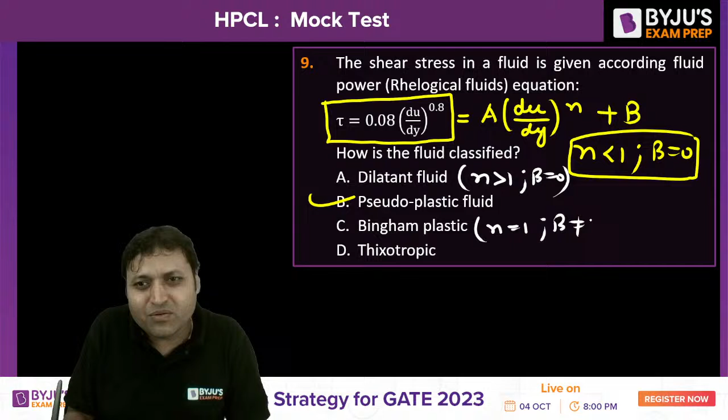Dilatant when n is greater than 1 and b equals 0, right? Bingham plastic when n equals 1 but b is non-zero. Thixotropic when n is less than 1 and b is non-zero. What is Newtonian? Newtonian when n equals 1 and b equals 0. What about rheopectic? When n is greater than 1 and b is... This is how you can compare and find out.

B is the right answer. Yes, very good.

You should not get confused. This is Newtonian, this is dilatant, this is pseudoplastic. Then there are 3 curves when tau is not 0: this is Bingham, this is rheopectic, this is thixotropic. This is the curve between du by dy and tau. These are the types of fluid based on viscosity, per Newton's law of viscosity.

The next question, question number 10, on your screen. Assuming that the kinematic viscosity - they may not have used the word kinematic, the unit will decide whether it is dynamic or kinematic viscosity - the kinematic viscosity of water is 1 centistoke, that is mu by rho, equal to 10 to the power minus 2 stoke, that is 10 to the power minus 6 meter square per second.

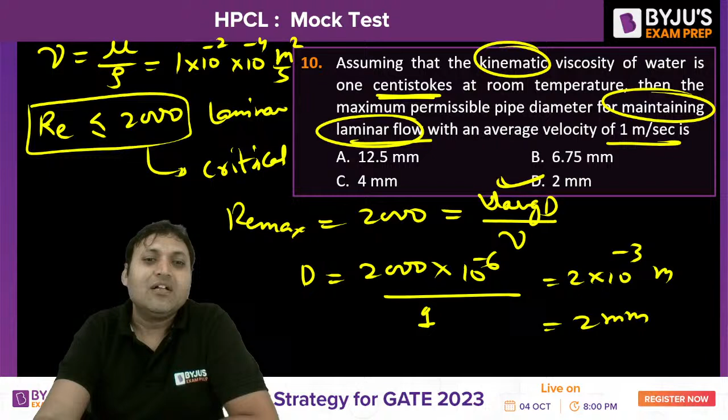For maintaining the laminar flow, that is the condition here. If you want to maintain laminar flow, then the Reynolds number cannot go beyond 2000. 2000 is the upper limit for the laminar flow.

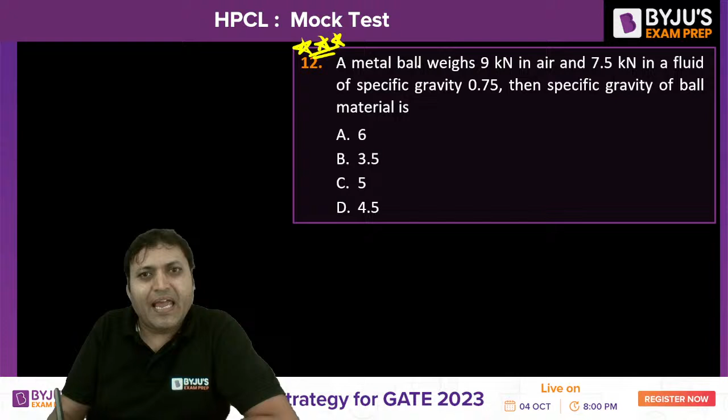Question number 12, from buoyancy and flotation. A metal ball which is weighing 9 kilonewton - so the actual weight is equal to rho of the ball into volume of the ball into G, equal to 9 kilo. But it is weighing 7.5 kilonewton in a fluid of specific gravity 0.75. Why is it weighing 7.5? Because the weight acts in the downward direction and there is a buoyant force.

So net weight is equal to W minus FB, that is equal to 7.5 kilo. From here, you can say actual weight used to be 9 kilonewton. So the buoyant force by the fluid is equal to density of the fluid into the volume of the body inside the fluid, or total volume of the body since it is completely submerged, which is equal to 9 minus 7.5, isn't it? That is 1.5.

If we divide these two, then density of the body upon density of the fluid is equal to 9 upon 1.5, that is 6.

Now the question is, what will be the specific gravity of the ball material? We need to find out density of the ball upon density of water. If we divide this by density of water, this will be 0.75. So specific gravity of the ball is equal to 6 into that, which gives 4.5.

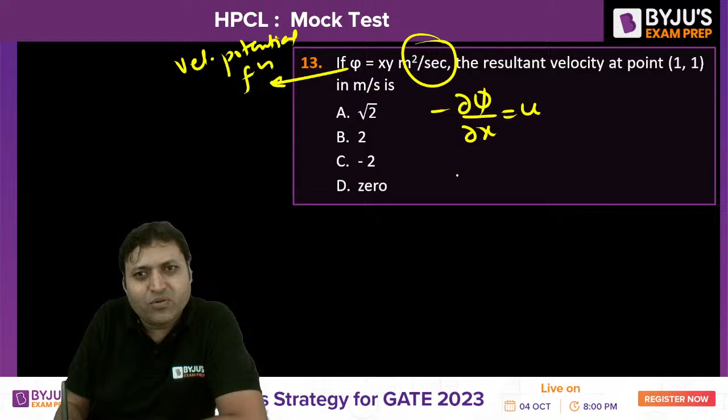If phi, that is velocity potential function, is given by xy meter square, the unit of phi is meter square per second. So we can say minus of del phi by del x is equal to u, and minus of del phi by del y is equal to v. The unit is meter square per second.

The resultant velocity, what is u? Differentiate phi with respect to x, that is y. So u is equal to minus y. What is v? v is equal to minus x. At point 1 comma 1, that is minus 1, and that is also minus 1. So the magnitude of velocity is under root of u square plus v square, that is minus 1 square plus minus 1 square, that is 1 plus 1, root 2.

Root 2 will be the answer. Option A, question 13. Option A will be the answer.

Now let us move to the heat transfer questions. Shall we proceed? There are around 7 questions from heat transfer and there will be 5 more questions from industrial engineering. This is a theoretical, memory based question.

What is the answer to question number 14? The efficiency of the fin. Fin efficiency is equal to Q actual upon Q maximum. That is efficiency of the fin with insulated tip. Option B, 1 upon ml when L is infinite. B is the right answer.

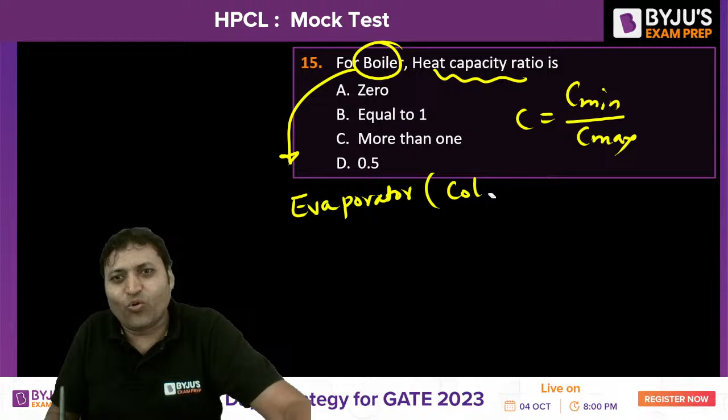C minimum, boiler means evaporator, we can also call it evaporator. Boiler or evaporator are the same. The cold fluid undergoes a phase change. When the cold fluid is undergoing a phase change, there is a phase change, so delta Tc is equal to 0. There will not be any temperature change, or we can say Cc is infinite. When Cc is infinite, then it will be Ch by Cc, and the heat capacity rate will be 0.

It will be 0, question number 15, option A. Option A is the answer. For boiler, the ratio of heat capacity rate will be 0.

And in that case, when C is equal to 0, or when any of the fluid is undergoing a phase change, the relative direction of the fluid flow becomes insignificant as far as the thermal performance is concerned.

Question number 16, again a memory based question. Whether you remember the formula or not, the Nusselt number is related to Reynolds number in laminar and turbulent flow respectively.

For laminar flow, Nusselt number is directly proportional to Reynolds number to the power 1 by 2 into Prandtl number to the power 1 by 3. For turbulent, Nusselt number is proportional to Reynolds number to the power 4 by 5 into Prandtl number to the power 1 by 3. For laminar, it is 1 by 2, 0.5, and for turbulent, the power of Reynolds number will be 4 by 5.

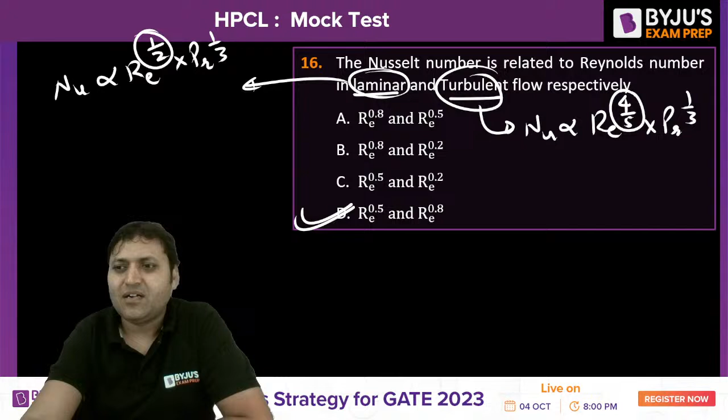If d2 is equal to twice d1, d2 is to d1, the percentage radiation from surface 2 to itself, that is F22, will be how much? That is the question. We can say F11 plus F12 is equal to 1. What is the self shape factor of the convex surface? It is 0, for convex surface it is 0.

And we can say A1 F12 is equal to A2 F21. So F21, that is the reciprocity theorem. F21 will be equal to A1 by A2 into F12, and F12 is 1.

One more equation, enclosure theorem: F21 plus F22 is 1, so F22 is 1 minus F21, that is 1 minus A1 by A2. A1 is pi D1 L, A2 is pi D2 L, it will be 1 minus D1 by D2. D1 by D2 is 1 by 2, so 1 minus half will be the answer, 0.5, percentage it will be 50. C is the answer, question number 17, option C.

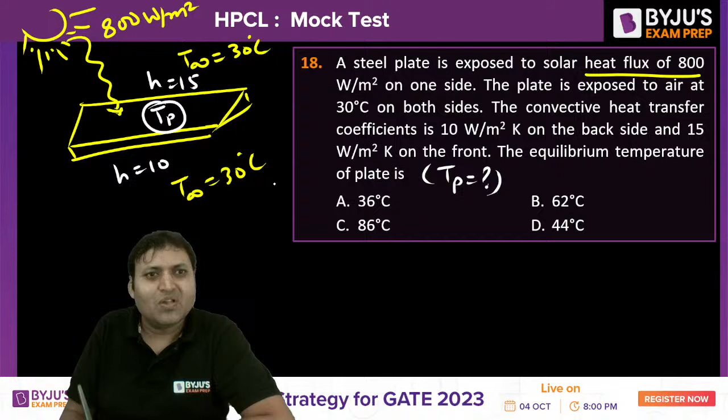The equilibrium temperature of the plate is asked. From the energy equation, heat entering equals heat leaving, and heat is leaving by convection from the front and convection from the back. Q is 800 per unit area: 800 is equal to 15 into (T minus 30) plus 10 into (T minus 30). So 800 equals (15 plus 10), 25 into (Tp minus 30), which gives the answer. Here it's written per unit area because front and back area will be same.

What is the answer? For question 18, option B, 62 degrees Celsius will be the answer. Correct, Umar, well done. What about others?

This is from heat generation. Again formula based, but whether you remember the formula or not, that is still the question. Second last question from heat transfer.

The center to surface temperature difference in a heat generating cylindrical rod of diameter 8 cm is 30 degrees Celsius. Under similar conditions, find the center to surface temperature difference in case of a sphere. For a cylinder, T maximum, the center temperature, equals Ts plus Q dot R square by 4K. For a sphere, T maximum equals Ts plus Q dot R square by 6K. These are the standard formulas when there is heat generation.

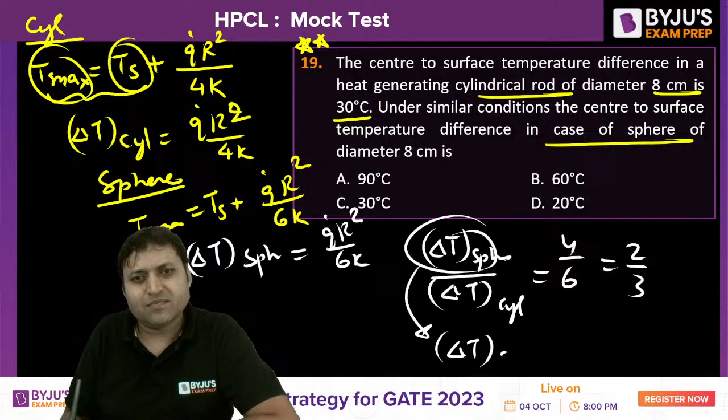So for this, delta T for a sphere is Q dot R square by 6, and the question asks: delta T for sphere upon delta T for cylinder will be how much? That is 4 by 6, which is 2 by 3. You can find delta T for sphere: delta T for cylinder is 30, so 30 into 2 by 3. What is the answer for question 19? That gives 20 degrees Celsius.

Last question from heat transfer, then 5 questions from industrial engineering. The question is from natural convection: a vertical surface 5 meter high is at 80 degrees Celsius and is surrounded by air at 20 degrees Celsius.

The value of average heat transfer coefficient at the location where Grashof number is 10 to the power 8 is 48.3. The average heat transfer coefficient at a location where the Grashof number is 10 to the power 4 is asked. You need to develop a relation between H and Grashof number. As the Grashof number is less than 10 to the power 9, the motion is laminar, it is the laminar boundary layer. For laminar boundary layer, for natural convection, Nusselt number is directly proportional to Grashof number into Prandtl number to the power... do you remember?

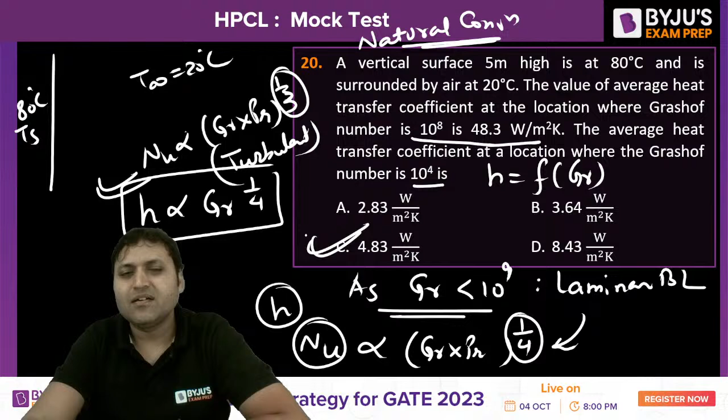Now 5 more questions from industrial engineering. The next question: the primal of an LP problem is maximization of objective function with 6 variables and 2 constraints. Which of the following correspond to the dual of the problem stated?

How to convert primal into dual, and why do we require that? To reduce the number of variables. If primal is a maximization problem, dual is minimization. The number of variables in primal is equal to the number of constraints in dual, and the number of constraints in primal will be equal to number of variables in dual. This is how primal can be converted to reduce the number of variables. If the primal has 6 variables and 2 constraints, the dual will have 2 variables and 6 constraints.

Statement 1 is correct, statement 2 is incorrect. If the primal is a maximization problem, then the dual will be minimization of objective function. So 1 and 4 are correct. Option B.

Question number 22. When solving the problem by big M method, if the objective function row shows optimality but one or more artificial variables are still in the basis, what type of solution is it?

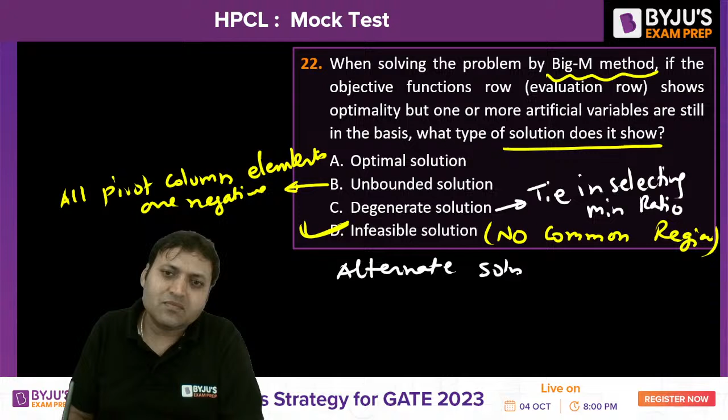Many solutions - alternate or infinite solutions occur when a non-basic variable has zero Z-row coefficient. These are the methods to find out whether the solution will be optimal, unbounded, degenerate, infeasible, or alternate. So D is the right answer for question number 22.

Which one of the following is not the solution method for transportation problem? This is simple. Question number 23 is very simple.

This is for the assignment problem. And these are the starting solutions for transportation. A is the answer. Question number 24.

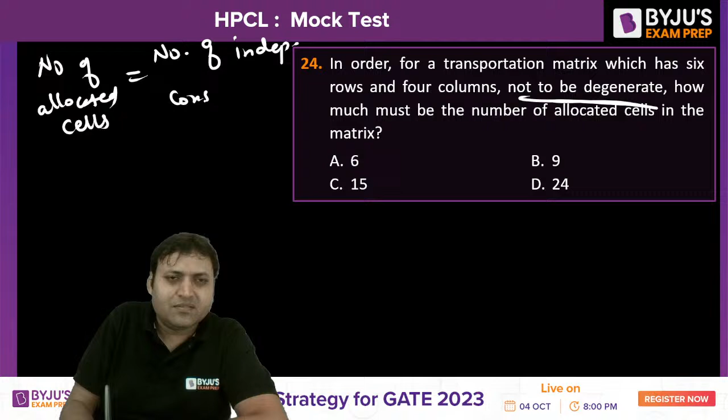Second last question for the day. For a transportation matrix which has 6 rows and 4 columns, not to be degenerate, the number of allocated cells will be equal to the number of independent constraints for no degeneracy.

For no degeneracy, the number of allocated cells will be m plus n minus 1 - number of rows plus number of columns minus 1, because there is one constraint which is dependent, we need to subtract that also. It will be 6 plus 4 minus 1, giving the number of allocated cells.

B is the answer. And the last question is from queuing theory. On an average, there are 30 customers in a queue, so LQ, length of the queue, is 30. If the arrival rate of customers into the system is 60 customers per hour... wait, arrival rate lambda is 16 per hour, and on an average 32 customers leave the system per hour, so mu, departure rate, is 32 per hour.

Then the average number of customers in the system, LS, will be how much? LS is equal to LQ plus rho, where rho is equal to lambda by mu, that is 16 by 32, which is 1 by 2, that is 0.5.